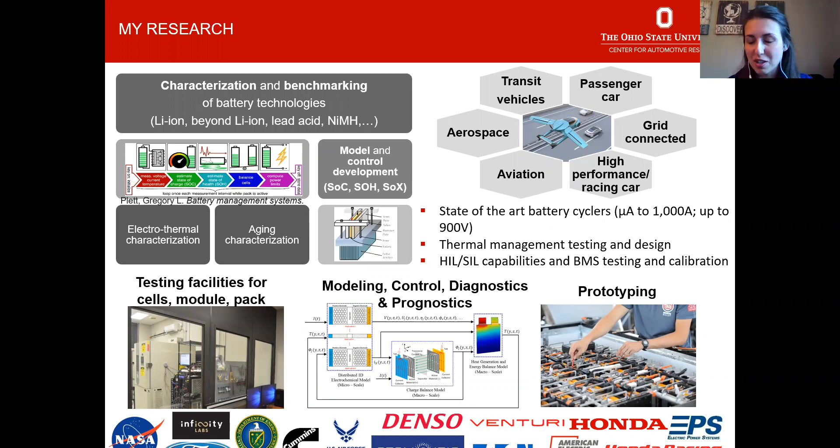The people that invented the lithium-ion battery received the Nobel Prize a few years ago. So lithium-ion battery is not a very old technology. It has gone very deeply into all our lives, in use nowadays in many, many different things. We don't know a lot about them. So we are studying to actually understand what happens in the cells when they are used, and how we can make sure that we can predict and we can design systems properly, that they don't fail, and also that they make all the business models work, because at the end of the day, what everyone cares about is money.

So after this introduction about the car, the center, and the research that we do, I want to provide a little bit of background about electrification and why we do electric vehicles, and which are the main opportunities and challenges that we have for these electric vehicles.

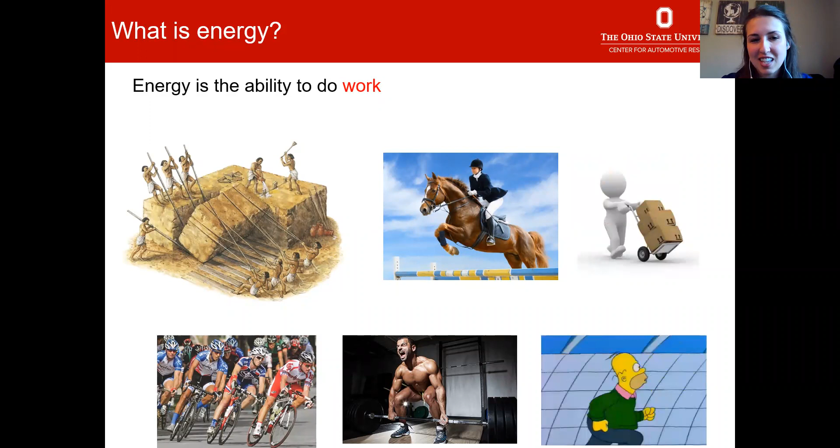So everyone understands energy. Energy is the ability to do work. And here there are some examples. Some of those are funny as well. In this case, we are looking at the energy or the capability of a person to do work. But we also have objects that can do work, like a vehicle that moves on a road is doing work, transporting a person or a good somewhere. And then there are roller coasters here. There are some other electric instruments that do work.

And what my research focuses on especially is objects that do work in this area. So we're talking about cars, so ground transportation, air transportation, renewable energy, and batteries. All of these are important topics today that are actually enablers to create a more sustainable environment for us, concerning energy production and also mobility, so how we move people.

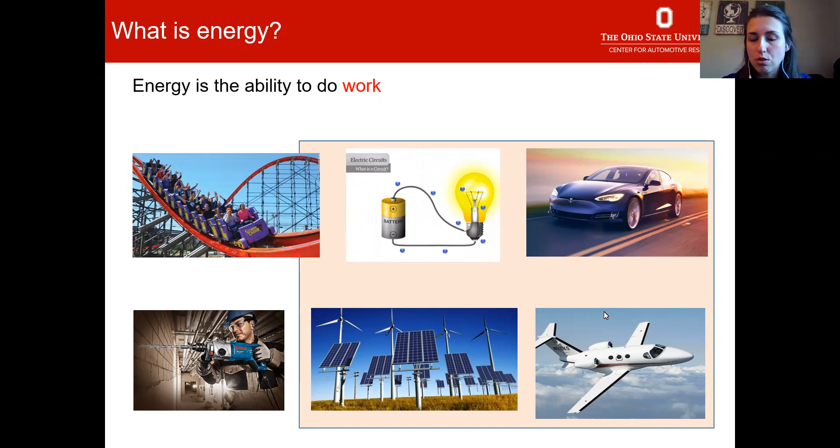And here, since battery is my research field, I wanted to briefly describe what a battery is. Without going into the chemistry of the thing, a battery at the end of the day is several elements connected together. When you put several materials together, there are some chemical reactions that happen. And this is what we leverage when we make a battery.

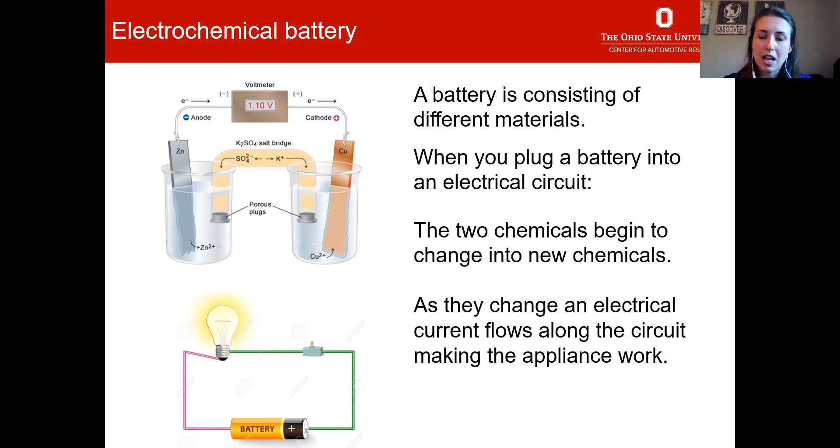So that chemical reaction that happens, like when you mix water with coffee, there is a chemical reaction happening there, and that's what makes your coffee from the coffee powder. And the battery is actually some other kind of material put together, and at a certain point some chemical reactions start to happen, and this is what produces electricity. And of course, the bigger the battery, the more electricity we can produce.

And one thing on batteries that we need to understand is that every time we have a battery, it is often several batteries put together. From the chemical perspective, we can build batteries that are around 3 volts as voltage. To make a bigger battery, we cannot make a battery that is just bigger in size. The only thing that we can do is actually connect more batteries together.

As an example, every one of you may be familiar with a Tesla. A Tesla has 7,000 lithium-ion batteries inside. So 7,000 batteries connected together. That's a large amount of things to control. Other vehicles may have more or less, depending on specific technology, but this is just to give you an order of magnitude. A computer may have 4 to 6 to 8 lithium-ion batteries inside, but a vehicle has many, many more.

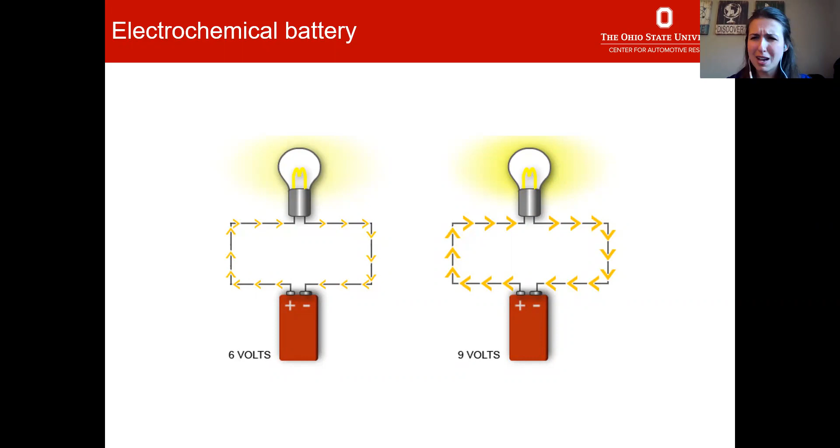So you understand that there are many challenges related to how to keep these batteries cool, how to organize them, how to control them, and so on. And this is what we do with some of the research that I have been carrying out.

So why electric? The main drive of doing electric vehicles is trying to reduce pollution. But it's important to understand that electric vehicles reduce pollution locally. What does that mean? Electric vehicles do not produce pollution where they are used, but to produce the electricity that you need to charge your battery, somewhere in the country someone is burning coal or using natural gas.

So the fact that electric vehicles are reducing emissions needs to be considered on a much larger scale, because locally the electric vehicle does not have a tailpipe, so we don't produce CO2 or other kinds of emissions that are dangerous for our country or in general for us. But at the same time, somewhere else the electricity needs to be produced, and depending on how that electricity is produced, it can be reducing or not our overall CO2 emissions in a broader picture.

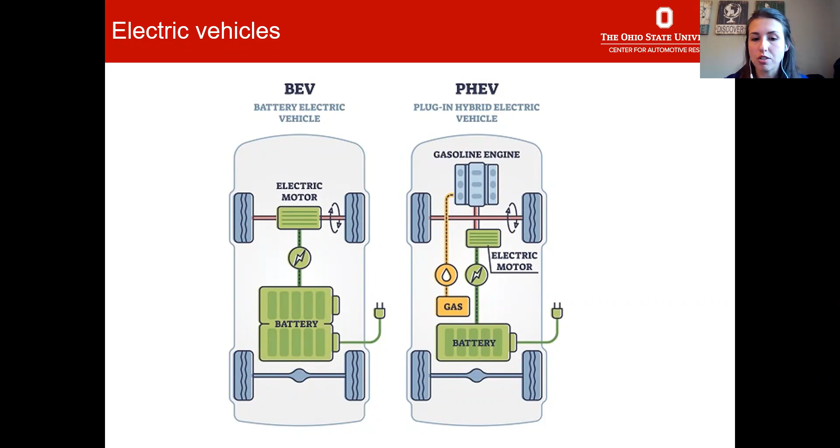And these vehicles are not as efficient as the battery electric vehicle, but for sure they allow you to have higher range because you still have some fuel on board. So many people are considering hybrid electric vehicles also because it's a technology of transition. In the future, possibly we will have more and more battery electric vehicles, but in the meantime, it is very simple for some of us to move to a hybrid electric vehicle, and the cost is more modest compared to a battery electric vehicle.

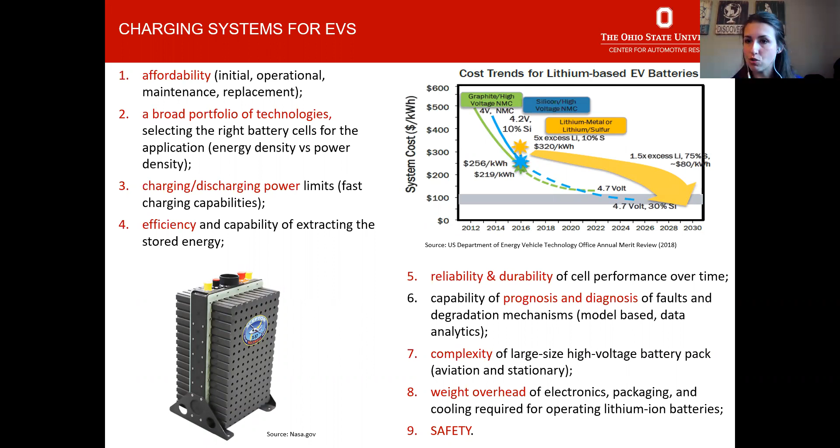The other thing that I wanted to briefly discuss today is about charging. So there is a big misconception on the charging side. And so I use this opportunity to talk with you about this, and maybe you can talk with your friends. And I think this is how we create community and knowledge about this. But charging for electric vehicles is not always a disadvantage.

When you may go to the charging station, maybe you're doing a long trip, you're going to South Carolina for a summer trip, and you may need to stop a few times on the way to charge your vehicle. And at that point, there are other options. And what we hear a lot now is DC fast charge, or supercharge, or extreme fast charger. There are several nomenclatures here, but those are higher charger capabilities.

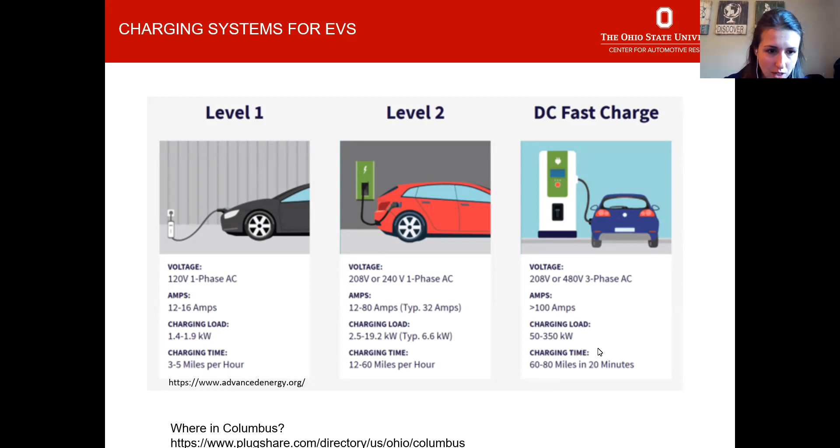So currently, let's say in 20 minutes, you could gain 60 to 80 miles. That, I know, is not very promising at the moment, but it is better than what it was some years ago. But these charging stations are now getting more available. So I actually have a link here that I wanted to share very quickly. There are many websites that actually keep track of the charging station locations.

And sorry, my computer is being a little bit funny at the moment.

Okay, let's see. So there are many available, but practically what these websites do is report all the charging stations in the area. And this is Columbus, so I just typed on the internet, charging station in Columbus. Sorry, my computer is acting funny right now. So they report all the status of the charging stations. They tell you the power, if they are busy or not, the company, the brand, and all kinds of information.

So step by step, the infrastructure is building, but it's clear that as of now, these fast chargers are not available everywhere or in every corner as it is for gas stations. But as you see from the number here in the area of Columbus, larger than 270, there are many opportunities in the city. And in the meantime, the Department of Energy, also with Electrify America, has been developing infrastructure between big interstates. So those are getting more and more available as well.

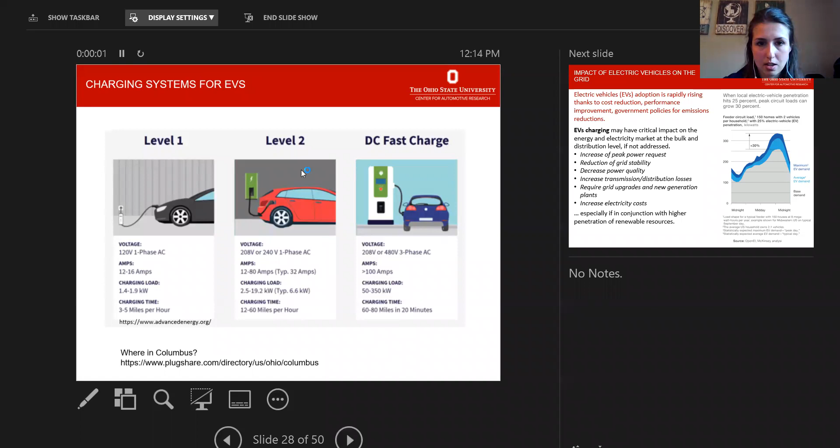So going back here to the presentation, I want to mention that unfortunately, all technology comes with some drawbacks. And one of the things that we are studying related to charging is actually the impact of charging on the grid.

The grid is designed now to provide power to our homes, to the industry, and to large enterprise. It's not designed to provide power to every one of us recharging. So there are a few things that we can do, but what is expected now is that the power demand on the grid could increase by 30% when we will have more penetration of electric vehicles.

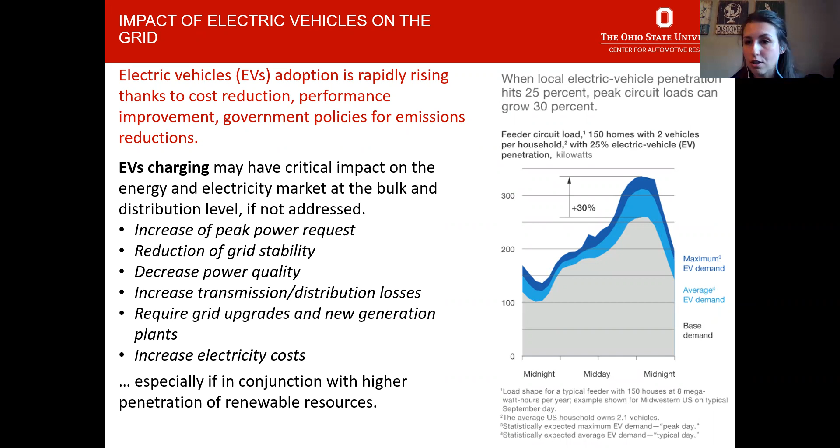So this higher power demand, of course, can cause issues over the long run because the grid is not designed for that. So part of my research is actually looking at how to mitigate the impact of the charging event on the grid. And this is especially coordinating things.

So one of the beauties of the research that we are doing nowadays is that we have data. Data are an amazing resource for us to optimize things. Because if I don't know your specific timing in requiring charging, I cannot plan ahead.

But with all the technology that we have today, we can coordinate vehicles and we can coordinate with you or with me on when I want to charge or when others are going to charge. I can coordinate with when the sun is available and there will be renewable energy available on the grid.

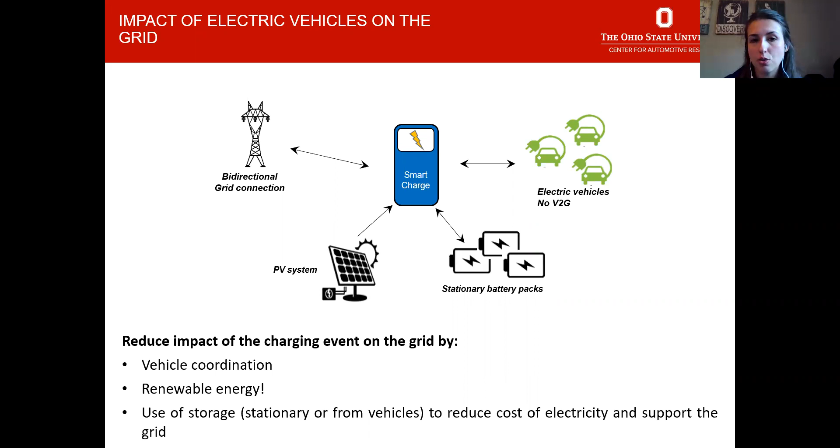So all of this capability of getting data and using technology like machine learning or artificial intelligence to actually learn from this data and develop algorithms that could coordinate things and avoid having high power demand on the grid. So this is some of the activity that we are doing.

And the other aspect here that I want to briefly discuss is the battery life cycle. As we understood, the battery is the central component of the electric vehicle. And you may have heard of all the effort that the federal government is making in trying to build an infrastructure to actually develop batteries in-house, because currently a lot of the batteries that we have come from Asia.

So developing the battery is actually not enough. We don't need to understand only how to make batteries. We need to understand what happens to the batteries when they are not good for the specific application. And there is very little market now, but in the future, when there will be more and more electric vehicles, we expect to have a circular economy, and that's what we are working on.

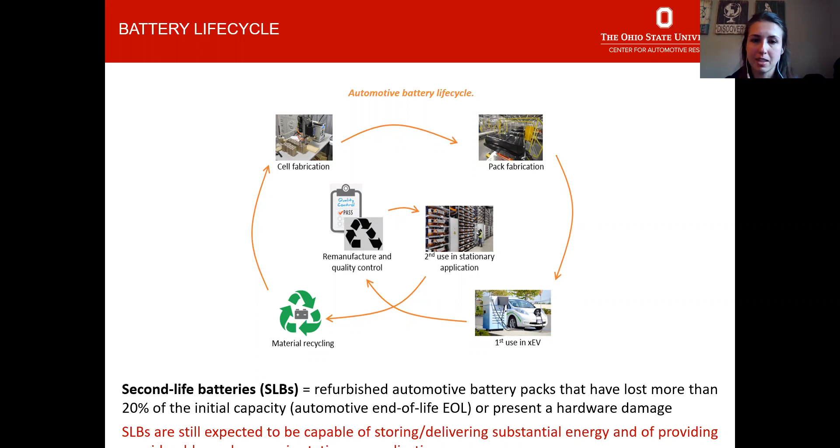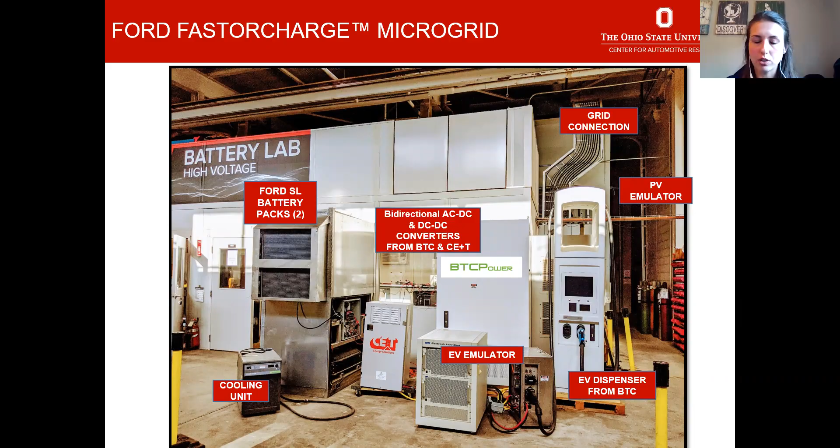I think last comment here, and then I will show a video and I will look forward to your questions. One thing that we have been working on quite a bit in the last 6 to 7 years now is also envisioning how we can apply some of the lessons learned in automotive to aircraft and to commercial aviation. So you know that automotive is currently one of the first producers of CO2 emissions from ground transportation, but then aviation is also one of the producers of CO2 emissions.

So we are heavily working with NASA, Boeing, GE, and others to try to understand how we can integrate batteries and electric propulsion into aircraft. Be sure this is not something that you will see in 3 years, 4 years, 5 years. This is more futuristic research, but we need to do this as part of our mission as researchers. We are looking at technology that is, let's say, shorter term, but also we are looking at more longer term research.

And aviation is for sure interested in doing their part in minimizing global warming and making sure that from one side we still enable people to move from point A to point B, but at the same time we want to make sure that we do this efficiently. And the aviation industry has always been utilizing the best technology, the most advanced technology, and they're trying to do the same also in this by looking at integrating batteries and other components into the vehicle.

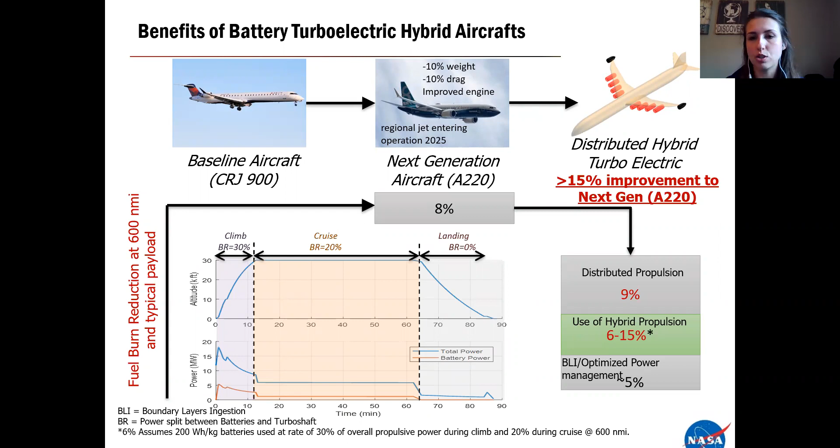So this was, let's say, a lot from my side, I imagine. But how long do we have? Because I do have a video and a few other comments. But I want also to have questions here. So we see what we can do. Yeah, you're good with time.

You're okay. Okay, perfect. So what I want to briefly present is the students' activity that actually brought me to OSU as a researcher in the first place. So I'm honest here, when I first heard about this project, I thought these American people were crazy. Because I was at a conference and there was Professor Rizzoni, the director of the center where I was working, presenting about this Venturi Buckeye Bullet and the amazing technology behind it, but also mentioning that this was a bunch of students on the side of a building building this vehicle and trying to make the world's fastest electric car.

And when you hear that for the first time, you kind of think that the person is crazy, considering that it's built by students. But actually, when I joined OSU and I started to work on this project, it was just amazing to see the commitment of the students after hours, volunteer students putting their time and their effort into developing something that at the end of the day is now considered the world's fastest electric car.

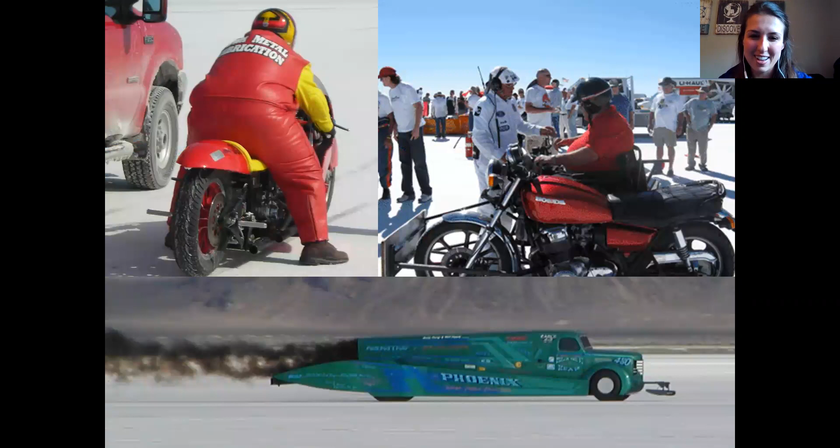So here there are other examples. Motorcycles are also allowed, and here there is a track. So this is a truck that was modified to be a Bonneville salt flat as well. And all of these vehicles are mainly based on combustion engines. But on our side, we wanted to bring an electric vehicle in the range as well.

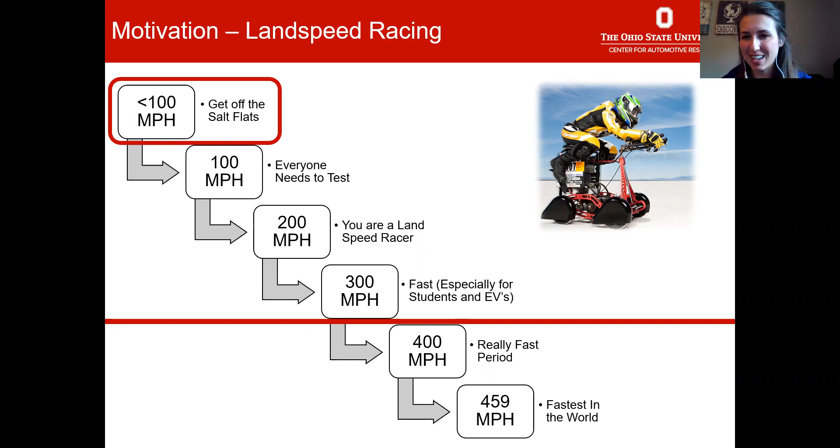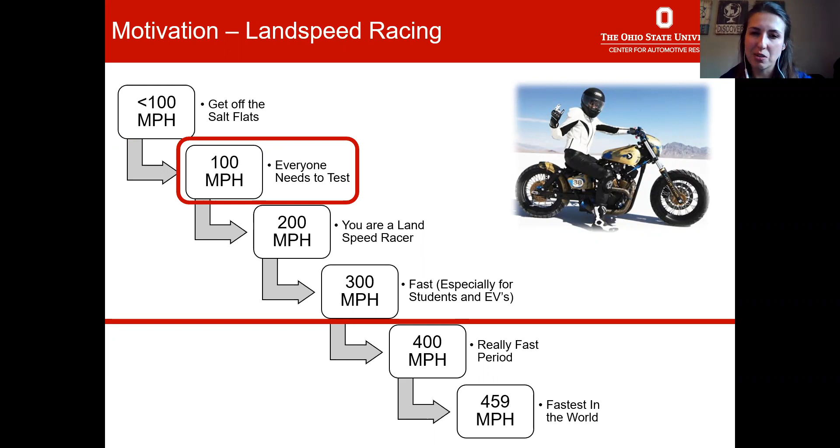And what I was mentioning earlier is that there are different classes of record. You go from lower than 100 miles per hour, and those are very special vehicles that are, let's say, sometimes kind of funny. And then you start to get more on the professional level with the vehicles that are attempting 100 miles per hour or 200 miles per hour, 300 miles per hour.

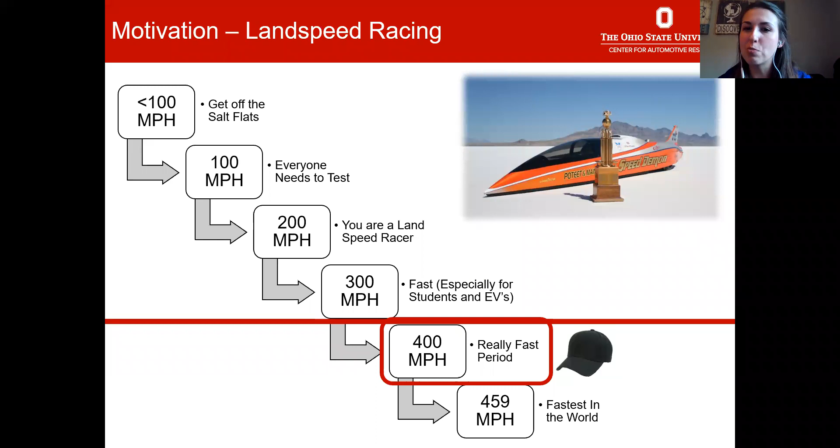You get very serious. 400, there is the Speed Demon that I think has been going more than 400 maybe 40, 50 times. So it's not only the world's fastest combustion engine vehicle, but it's also the vehicle that has been attempting more and more records. So the driver is one of the most experienced drivers at this speed. Yes, and this is the Turbinator as well. So there are many different things that you see there.

And OSU has been going to Bonneville Salt Flats since 2004. So almost 20 years, and always with electric vehicles, kind of being the first to attempt with an electric vehicle. And you can imagine a bunch of students and a professor going there and getting to interact with people that have been in racing for many, many years. The start was not easy to build a reputation in that kind of environment, but it has changed. The fact that they allowed us to go there many, many times, I think it says something.

But in 2004, we were the first electric vehicle to reach 314 miles per hour. And this was with the battery from the Toyota Prius. And then we put a fuel cell into the vehicle and we went also 300 miles per hour. Then we put lithium-ion batteries and we built this other crazy monster here and we went 341.

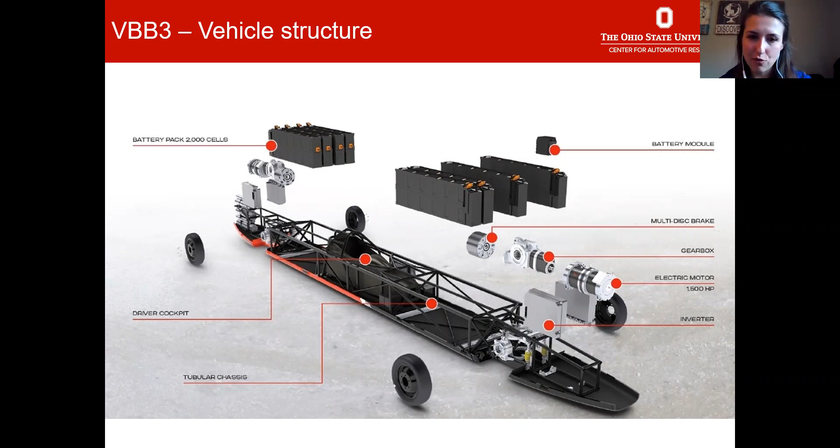So I joined the team in the last vehicle, but they have a long history here of attempting high-speed records. So the vehicle is very complicated. It has a bunch of batteries inside, many electric machines, power electronics, gears, all kinds of things. And I won't go into detail. If you have a question, we can for sure look at this.

But what I want to tell you is that the vehicle is almost 8,000 pounds, of which almost half of it is batteries. So it's a gigantic, let's say, mass of batteries. And then there are many other things for sure, but batteries are like 45% of the overall weight.

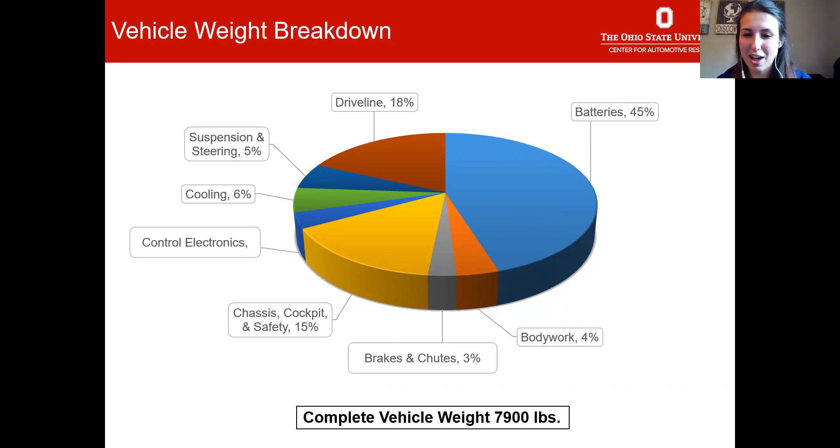And I have now a video, and I would say in advance, these videos are not done by OSU, they are done by the company. So they are a little bit over the top, they are very fancy. So this is not to brag, but from my point of view, they could be a little bit more simple and representing the real world experience, but I will shut up.

Okay. Can you hear the noise? Oh, okay. Probably yes. No. Oh, no? Okay. How do I do that? Let me see. Maybe. Let's see now. Yeah. Okay, perfect. So let me start. Well, I heard it for a minute. No, can't hear it now. Let me do this. Okay, I may start. Now? Still no noise. I don't know how to do it, so you watch the video.